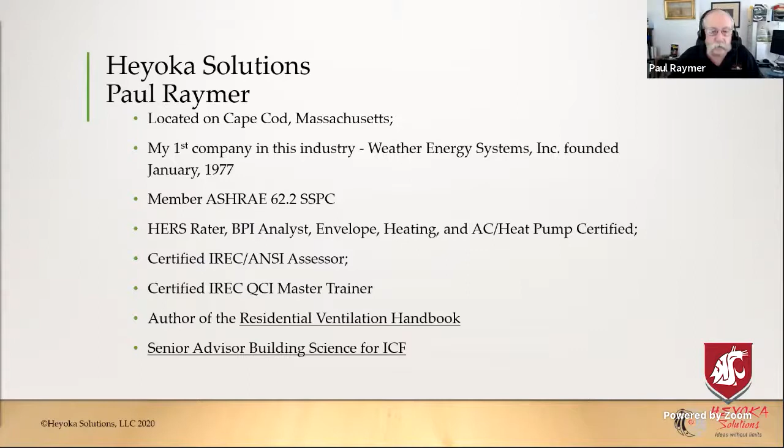I have been doing this for a long time. My company's here on Cape Cod in Massachusetts, and I've been working with fans and airflows and buildings since 1977. My first company was called Weather Energy Systems, which assumed that anything that changed could generate energy. And weather is always changing, so I thought that'd be a great name for a company. I've been part of the ASHRAE 62.2 ventilation committee for 10 fun-filled years. And I've got a whole bunch of those BPI certifications, as Ray said. And I've been told that I really should get a life. It's kind of fun to say I wrote the book on that when people start talking about mechanical ventilation.

Among other things, ventilation is the basis of IAQ or IEQ, indoor environmental quality. And that's what we're going to talk about today, along with a bunch of other things, nasty things, a bunch of nasty pollutants with ghoulies and ghosties and long-legged beasties and things that go bump in the night. There's a lot of stuff in this session, a lot of technical and scary stuff, but also a lot of practical sense stuff that will help you, I hope, to appreciate what's going on in the air around you. The more you know, the better you can be at your job.

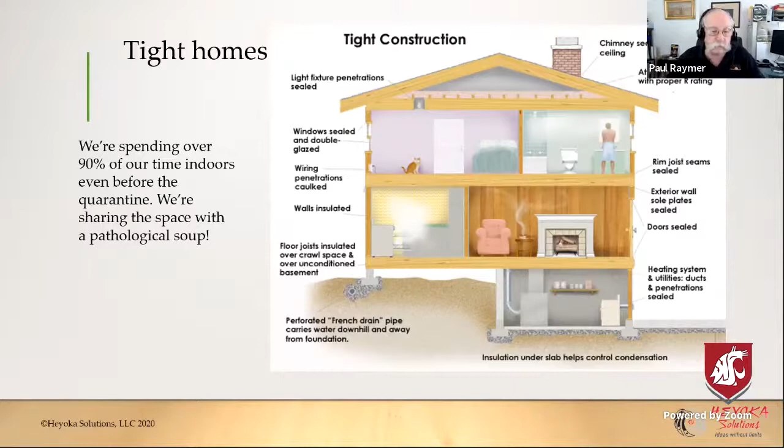So if we breathe 3,000 gallons of air per day, it needs to be good air, clean air, not the air that's replete with all sorts of bad microbes. But we don't want to get rid of all the good microbes, the microbes that fight off the bad microbes.

We bring all sorts of stuff in our homes. The stuff builds up and fills the attic and the basement, and the VOCs, the volatile organic compounds, the stinky stuff builds up as well. And so people buy air fresheners to cover up the smells. If you joined my session yesterday, you may have heard me go through this slide, but some of it's worth repeating. I'm not fond of air fresheners. They often contain lots of toxic chemicals.

The toxic chemicals released by air fresheners, particularly those with pine, orange, and lemon scents, are known as volatile organic compounds, or VOCs. These are well-proven toxins, many of which have been linked to a range of diseases and conditions when being inhaled even in low concentrations over a long period of time.

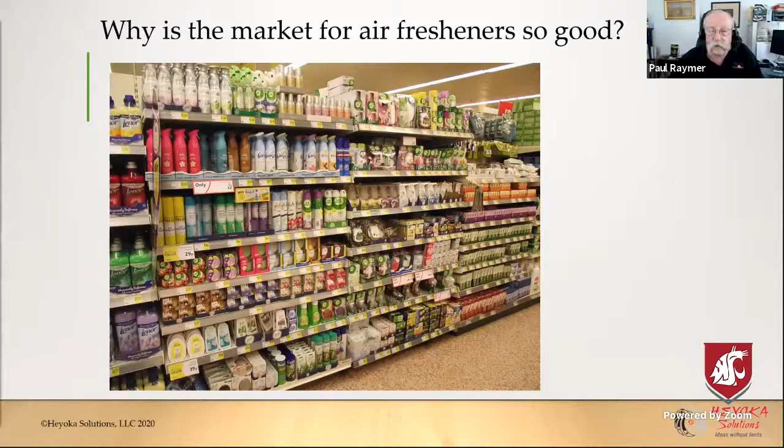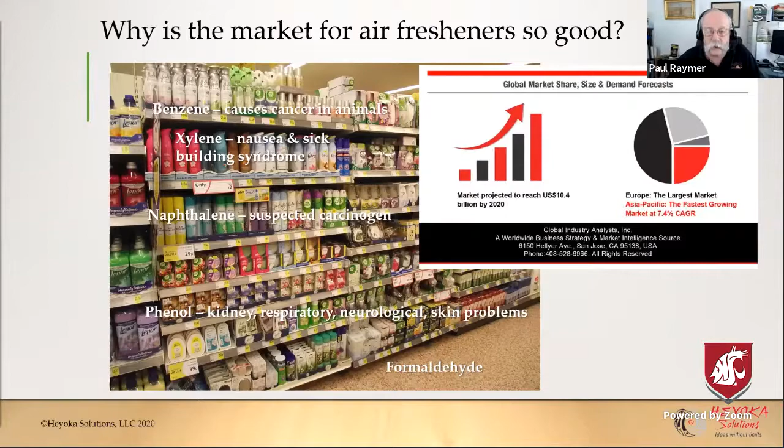Mechanical ventilation can dilute the pollutants in the house, so why not just put a good ventilation system in and let it run a lot, if not all of the time? The global market for these products is surging, but the smells don't get to the root or the cause of the problem.

We're lucky that people are paying more attention to the health in our homes, and not just in special or extreme cases. BPI has had the Healthy Home Evaluator certification for a number of years now. They've just added a Healthy Housing Principles certificate, and the EPA will be sending the Indoor Air Plus for existing homes certification out for public review in October. That's the program I've been working with.

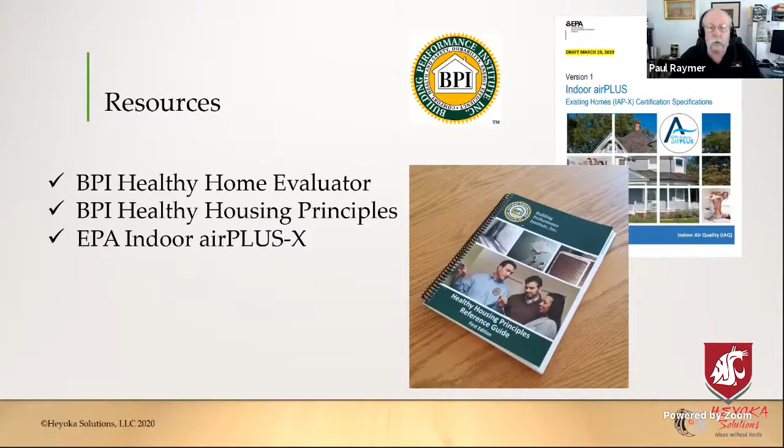The HHP manual is very readable and well illustrated, and not loaded with a lot of incomprehensible technical jargon. Kevin Kennedy was the lead author, and he had a lot of great support authors. You can get this from BPI.

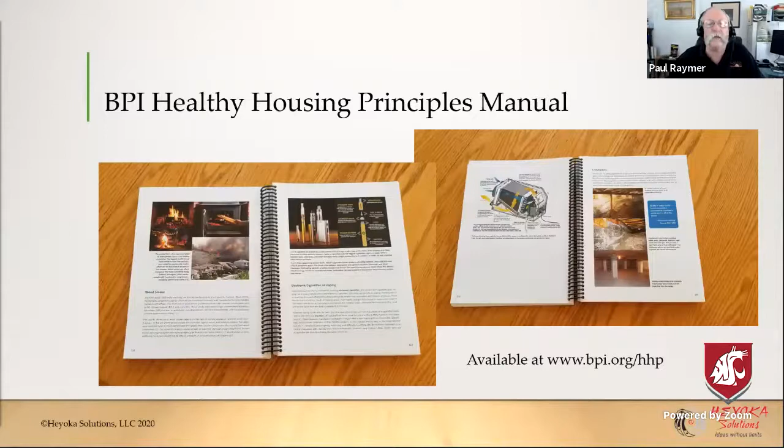So we wanted to get action levels for all these contaminants into the program, but unfortunately, most of the levels are for outdoor thresholds. Part of the problem is that people have different reactions to these contaminants. What might be critical to one person might have no effect on another. And the pollutants are not simple static things. They keep changing and are different in different parts of the house.

But ideally, you would survey a house and look for all these things: arsenic, carbon monoxide, formaldehyde or HCHO, NOx, ozone, PCBs, and particularly PM 2.5 particles and radon.

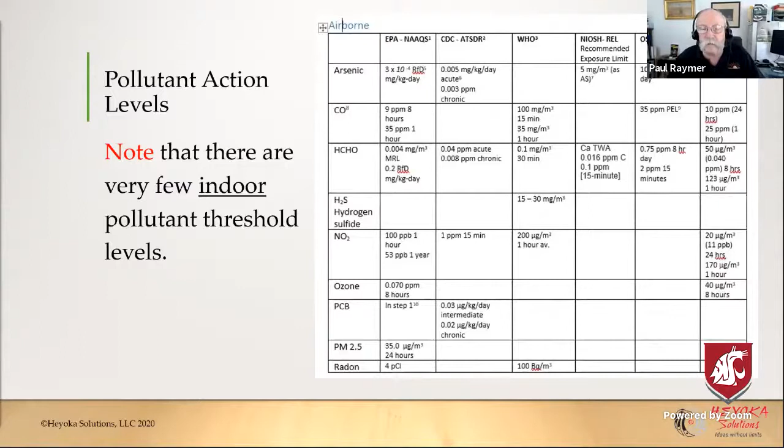So you want to start with the occupants. Smell generally has a short perceived time. Smell is a sense located in the nasal cavities of mammals and relying on the olfactory nerves by which molecules borne in a fluid such as air can be perceived, the olfactory sense.

Occupants are probably the best diagnostic tool. They can't provide a documentable level, but they can relate symptoms and relative levels. Like, does it smell more today than it did yesterday? Did you cook fish last night?

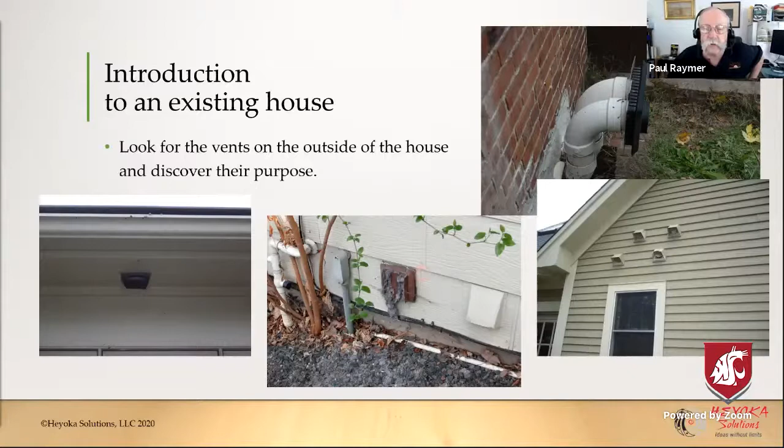The outside vents are part of the nose of the house. Notice that dryer vent installed sideways, full of lint. I don't know how the louvers are going to work with it going sideways, but I once found a dollar bill stuck in the louvers of a dryer vent. You could assume that the lint filter in that dryer was not functioning very well.

After talking with the occupant, a walk through the house can help you get a visual identification of the pollutants. It's like looking for clues in a mystery. What, where, why, when. I tell my students it's like CSI. With that in mind, the hazards can be prioritized and justified.

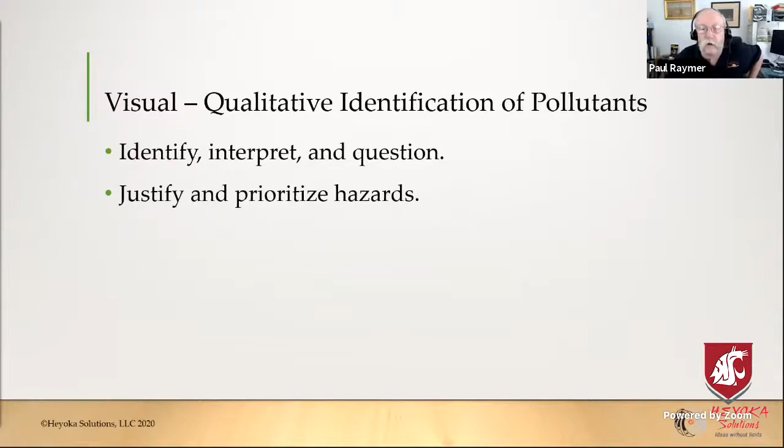Critters can get in lots of places, including ventilation systems. Don't attach ductwork to the fan with screws because they may interfere with the operation of the backdraft damper. And other obstacles like dead bats will also interfere with the airflow.

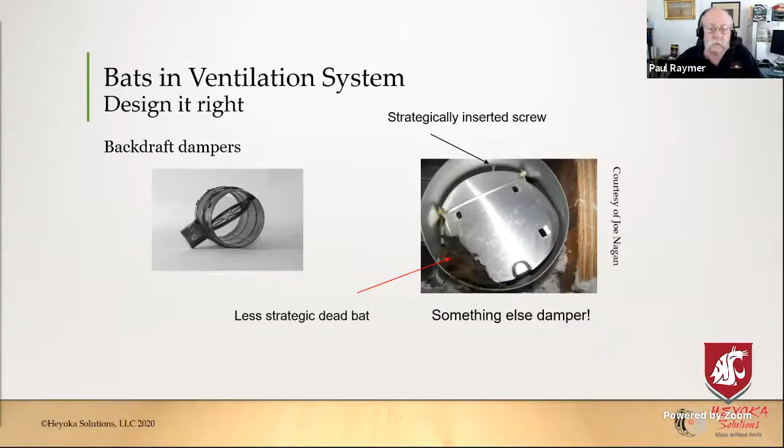And it's important that ventilation systems such as this be located in a place where they can be serviced. The occupant is breathing this air. It kills me when installers put the HRV somewhere in the attic where people will never get to.

What do you suppose is causing this staining on the ceiling? Looks like the heat from the bulbs in the chandelier. Well, that's causing the air movement, but what's in the air? Cigarette smoke and nicotine. This is the home of a heavy smoker. Those stains are going to be virtually impossible to remove, and there will be a third-hand smoke issue in this house for a very long time.

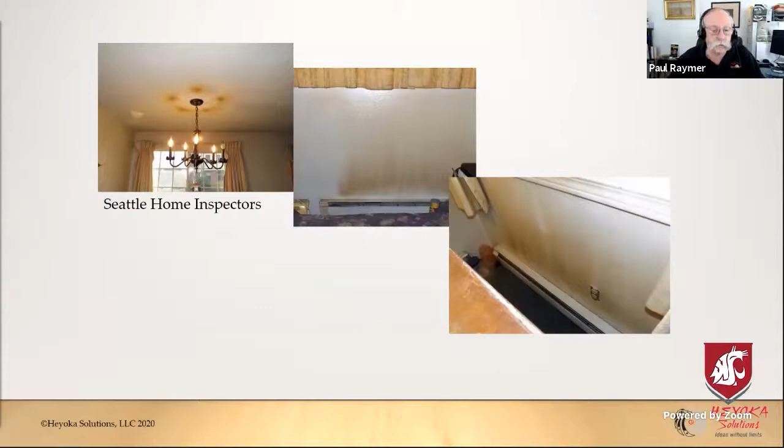Clothes dryers mechanically draw air from the house and blow the warm, moist, and lint-filled air back out to the outside. They commonly draw the air in from the bottom. So it's important not to surround the base of the dryer with junk like dirty clothes and other things. It's also important to keep the lint filter clean. I had to clean this one out with my Leatherman.

Also note that as houses get tighter, clothes dryers may need to be supplied with direct makeup air, or the clothes will simply cook. Dryers can move up to 200 CFM. And if the house is tight, it's going to be hard to move 200 CFM out because it will be hard for 200 CFM of air to find its way in. In a tight house, the dryer can act like a small blower door.

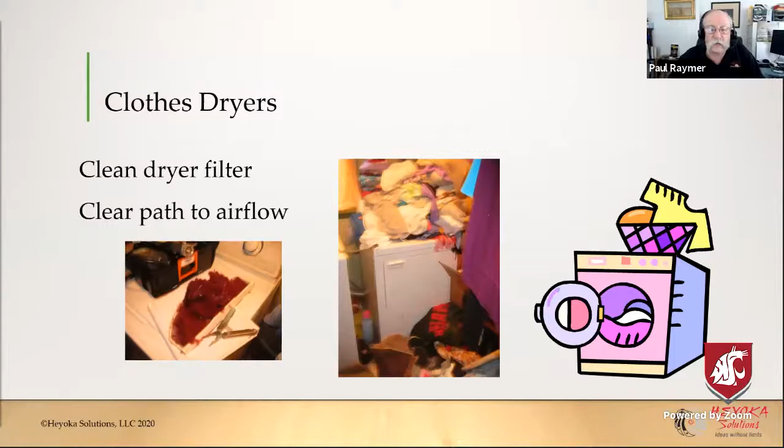And it's important to prioritize the issues to be addressed. Something that's acute is a condition that needs immediate attention. It's extremely great or serious, crucial or critical, like a heart attack or a leaking water heater. Chronic is a condition that's continuing or occurring again and again for a long time, like a nagging backache. So you want to prioritize acute issues over chronic issues.

Then you want to look at cost and easiest to address, because you might just be able to wear a mask in public, for example. If you know what the biggest health benefit is, do that next. And then the fastest health benefit, which will probably take more experience and training.

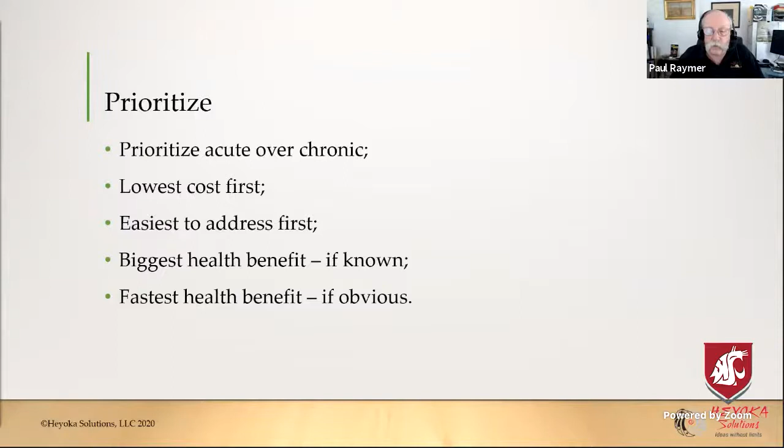These are some of the health impacts from moisture. Excess moisture is associated with an increased rate of respiratory disease. Most seriously, mold can trigger asthma attacks in sensitive individuals. They can also adversely affect immune system function. Note that mold needs liquid moisture to grow. It doesn't need very much, but it needs liquid moisture.

Note that there are three main health problems related to moisture and mold: asthma, infections, and allergies. Symptoms for these health problems include cough, wheezing, shortness of breath, asthma attacks, irritation, and itching.

But the house shouldn't be too dry either. Ideally, we want to keep the house between 40 and 60% relative humidity. That's the kind of range they keep the Mona Lisa in. And she's been doing all right for a couple of hundred years. But the concepts behind humidifiers and dehumidifiers are not well understood by occupants. They have to be maintained and controlled.

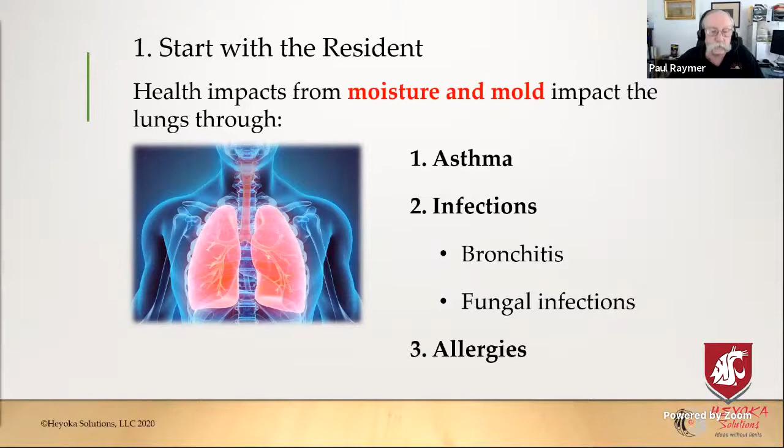The concern about sanitation problems centers on reducing exposure to hazards that can cause health impacts. The health impacts from all of the hazards noted here can be reduced by cleaning, but keep in mind that cleaning is just one part of a multi-intervention approach that is almost always needed. For example, you can clean residue from ETS from a house, but an additional intervention should be persuading the resident to smoke outside. Cleaning can help reduce pesticide residue, but implementing practices to manage pests by reducing their access to food and water is also a way to reduce the use of pesticides.

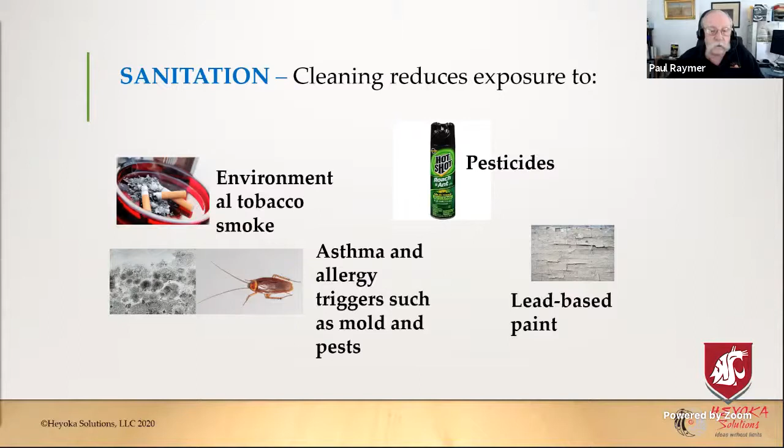These are the health impacts from environmental tobacco smoke, also known as ETS. Again, cleaning reduces the exposure to this contaminant. Most people should be very familiar with the health problems relating to what happens if they smoke, but may not know as much about second and third-hand smoke. Secondhand smoke occurs when someone uses and exhales tobacco products such as cigarettes, cigars, or pipes, and the smoke is then inhaled involuntarily by others.

Third-hand smoke is nicotine residue that remains on surfaces, including walls, doors, drapery, carpets, clothes, furniture, flooring material, books, and acoustic tiles in the ceiling. This pollutant can also be inhaled when it is re-emitted through dust in the air, and it can react with substances in the environment to create secondary pollutants on surfaces.

Tobacco smoke contains more than 7,000 chemicals, including hundreds that are toxic and about 70 that can cause cancer. Since 1964, it's estimated that 2.5 million deaths are attributed in the US to health problems caused by exposure to secondhand smoke. In the US, secondhand smoke causes approximately 3,000 lung cancer deaths annually among non-smokers.

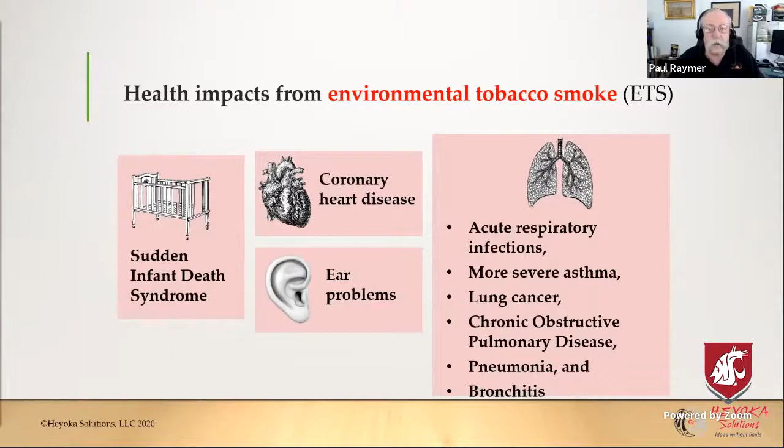These are the health impacts for asthma from asthma and allergy triggers. Note that there is a difference between asthma symptoms and the development of asthma. Having asthma symptoms means an attack has been triggered and the individual is coughing, wheezing, or having shortness of breath. Developing asthma means a doctor has diagnosed an individual as having asthma.

There is strong evidence that indoor mold can contribute to asthma development. The 2009 World Health Organization guidelines for indoor air quality on dampness and mold says that there is sufficient evidence of an association between dampness, mold and asthma development. Now, that does not mean it is accurate to say that mold causes asthma development, simply that evidence shows it can contribute to asthma development. Mold also triggers asthma symptoms.

There is also strong evidence that dust mites can contribute to asthma development. The 2000 Institute of Medicine report called Clearing the Air: Asthma and Indoor Air Exposures says that there is sufficient evidence of a causal relationship between dust mites and the development of asthma.

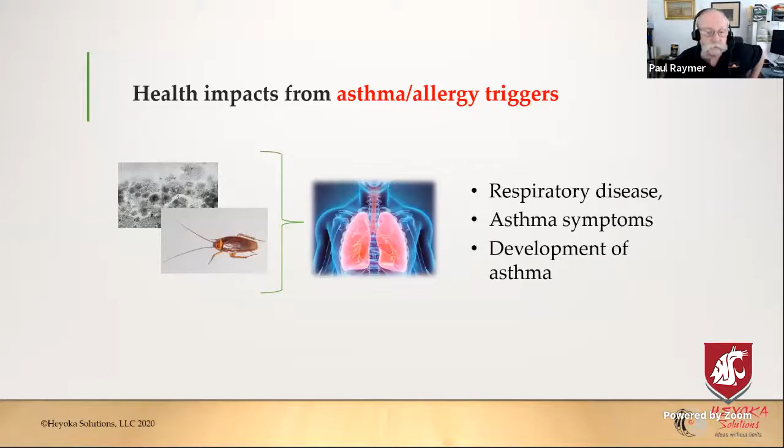Paul? Yes, sir. We had one question that may kind of tie back into the secondhand smoke. Have you seen any data on secondhand vape or any data on vaping related to this as well? That's a great question, and one I was thinking about this morning. But I haven't done any research on it. Just a cursory amateur's opinion on that is that the smoke from vaping has a similar kind of impact, but that's just off the cuff. I wish I could give you a better answer to it. I guess my primary answer is just don't do it.

Is that okay? Yes, it is. Thanks. Sure.

All right, so the health impacts from pesticides are not a whole lot better. The Pesticide Safety Education Program at Cornell University's Cooperative Extension Program notes that the symptoms of pesticide poisoning are similar to those of other types of poisoning and other diseases. Heat exhaustion, food poisoning, asthma, and other illnesses are sometimes confused with pesticide poisoning. Just because a person has become ill after using or being around pesticides does not offer proof that he is poisoned.

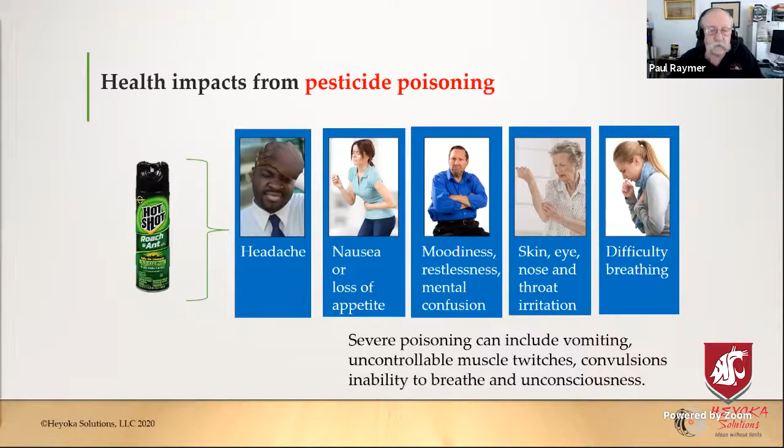These are the health impacts from lead. Cleaning and other maintenance tasks will reduce the exposure to lead, but always remember that there are other interventions that may be needed, e.g. safely removing any lead paint. And we'll talk some more about lead later on in this presentation.

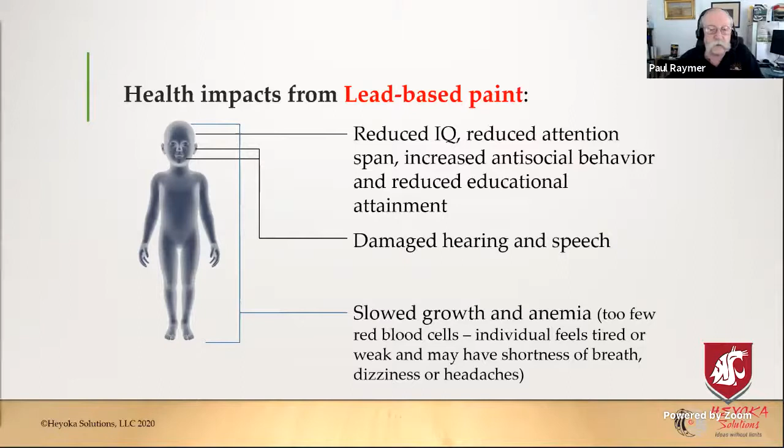These are the health impacts from critters. Dust mites, cockroaches, and mice are all potent asthma triggers. Pests also spread infectious disease. Both cockroaches and rodents can carry dozens of bacteria, viruses, and even fungi. Mice are a reservoir for and can vector salmonella.

Deer mice can vector hantavirus. Hantavirus initially causes flu-like symptoms and abdominal problems. Late symptoms include coughing and shortness of breath as the lungs fill with fluid. There's a mortality rate of 38% from the hantavirus.

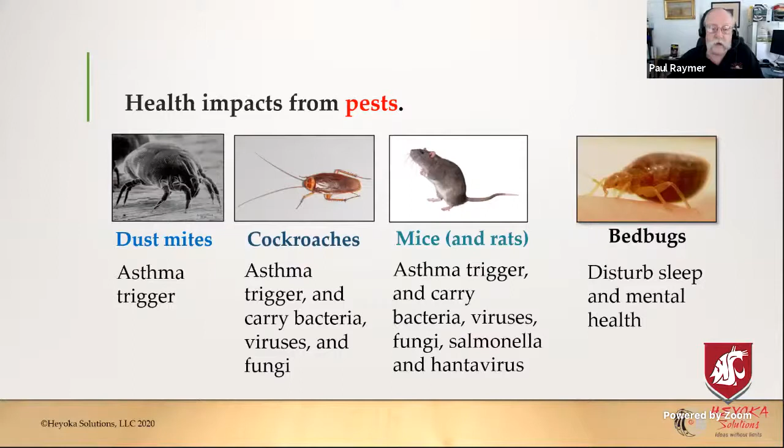When applying insect repellents to children, read all the directions first. Do not apply over cuts, wounds, or irritated skin. Do not apply to the eyes or mouth or hands or directly on the face. Also, use just enough to cover the exposed skin or clothing, but don't use it under clothing.

Many plants are poisonous and should not be found in houses or yards with small children. Occupants should learn which of their outdoor and indoor plants are poisonous and teach their children not to put plants in their mouths.

It's a picture of ants in a sunny sliding door sill. Moisture that the ants need condenses on the glass. The ants don't usually cause allergic reactions, but pesticides sprayed on them might, as we just went through. Often the best solution is patience. Follow the ants as they carry food home and then destroy the nest.

If you see a line of ants making its way through the house, follow it to determine its origination point. Ants can enter through a window, molding crevice, or even a crack in the floor. Keep food in tightly sealed containers or in the refrigerator. Food left anywhere else may attract more ants.

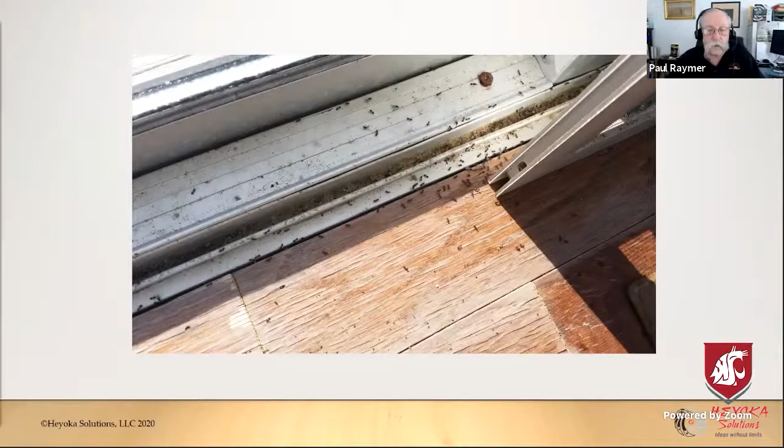The late gastronome James Beard exulted, "There is no smell in the world of food to equal the perfume of baking bread." However, part of that perfume is ethanol, a natural alcohol given off as yeast metabolizes bread sugar during the fermentation that makes the dough rise. When the temperature of the baking bread reaches 174 degrees, the ethanol, a volatile organic compound, or VOC, as the environmental wonks would say, is released into the air.

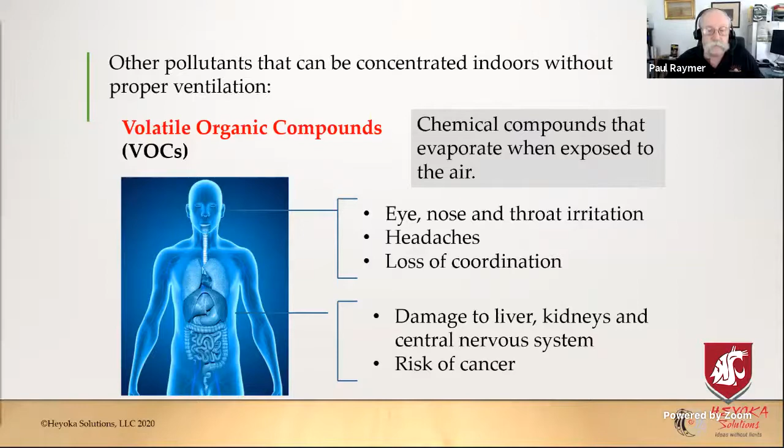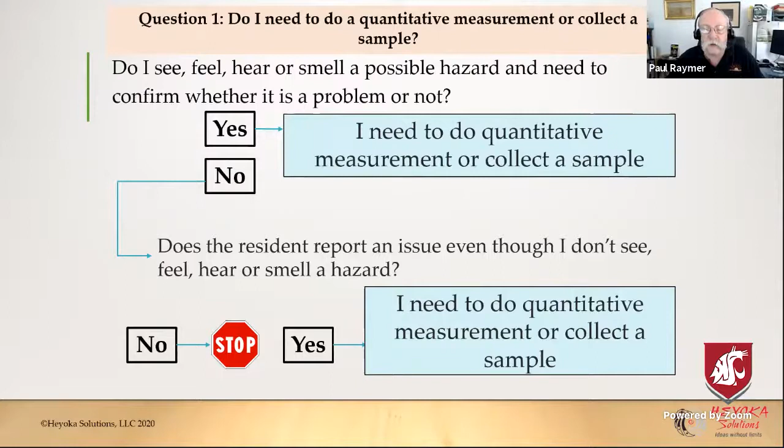You may need to use quantitative measurement and sampling if you need to confirm that something is or is not a hazard. It may be that you can see, feel, hear, or smell a possible hazard, or the occupant reports an issue. Either way, you need to confirm whether there is a problem. Keep in mind that the quantitative measurement should be done in support of or to clarify visual qualitative findings. So let's look at some examples.

First example, you don't see anything wrong with any of the gas appliances in the house, but the occupant reports symptoms that sound like carbon monoxide or CO poisoning. You collect as much information as you can by asking the occupants questions like, do the symptoms disappear when you go out of the house? Does it only happen in the morning? Do you close your bedroom door at night?

You may come to a conclusion as to what's happening, but you need to support that conclusion with a quantitative measurement. The answer to this first example is yes, you do need to do a quantitative measurement. You need to measure if the CO level is above the actionable thresholds. And this is the primary reason that the level of CO in the house needs to be monitored throughout the building analysis. Be sure to make the connection with the HVAC system.

Second example, let's say that you're conducting an assessment and it's very clear that the house has a substantial mold and moisture problem. You see that there is considerable mold on the interior basement walls. Well, you don't need to measure how much mold there is. I mean, you may need to measure it for remediation, but you don't need to quantify it for analysis. You could check the moisture problem with a moisture meter or sample the air or the surface mold, but you can see it. You might want to do sampling for other reasons, depending on the purposes of your assessment. So the answer to this second example is no, you don't need to do quantitative measurement.

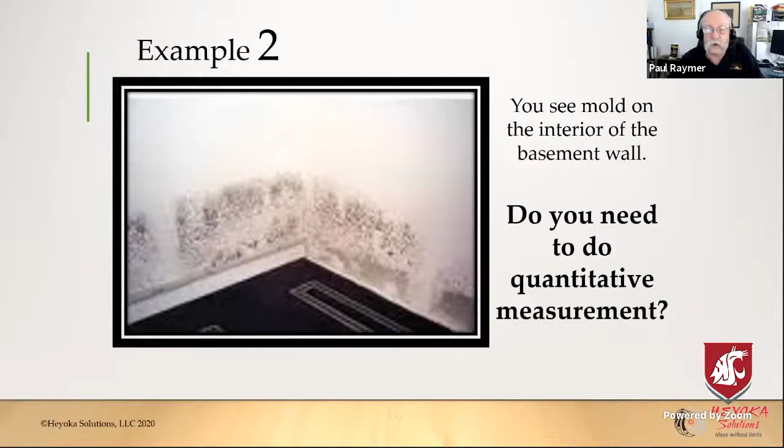Third example, you observe a variety of surfaces in a home that are extremely damp, but you don't directly observe the classic spots indicating mold colonization. In some instances, a uniform, almost transparent fuzziness is just detectable above the surface. This is often not detected through observation, but is clearly represented in the results of samples collected in a damp room with these surface characteristics.

There are simply times when moisture and mold damage is more hidden or of greater complexity. At those times, you should measure or sample to confirm or reject your hypothesis that there is a moisture issue. So the answer to this example is yes, you need to support your observation, your visual assessment with quantitative measurement.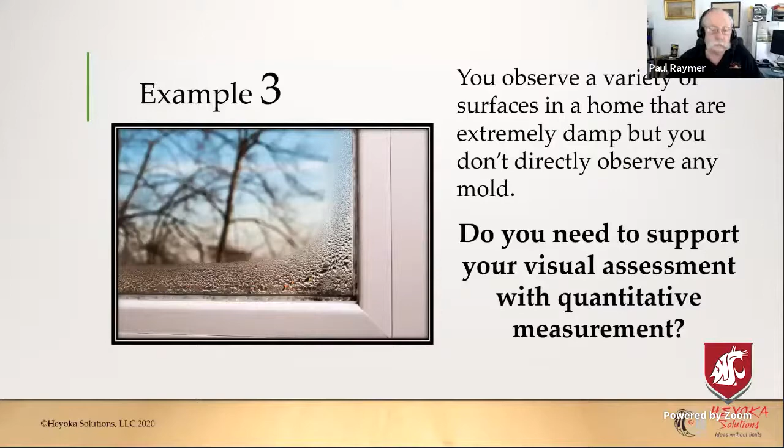Fourth example, and the answer to this one is yes, you need to do quantitative measurement. This is a more complex situation, but not unusual. There are various triggers for allergy and asthma, so quantitative measurement can help the occupant to pinpoint the problem in his or her house. Using vacuum sampling to take a dust sample, you can send it to a lab and determine if the dust mite level in the house is above the health threshold.

In other words, even if the occupant is keeping the house dust-free, he might actually not be doing quite enough. He may also have to address other things, like more regular washing of bedding, getting dust mite covers for his son's pillow and mattress, keeping the pets off the bed, getting rid of stuffed animals, and regulating the humidity level in the house.

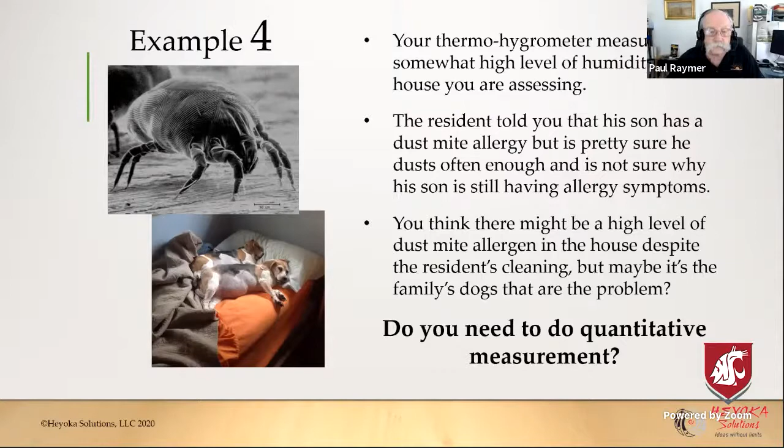So if the answer to the first question is that quantitative measurement is required, then how do you choose the right tool to do the measuring? Choosing the tool you need depends, of course, on the purpose of the assessment. The purpose determines the data quality objectives you would have. Data quality objectives are the characteristics of the data you need. Validity and sensitivity are two of the characteristics that you need to think about.

Here are a couple of examples. A smoke stick tells you which way air is flowing, but an anemometer tells you how fast the air is flowing in feet per minute, which can be converted to how much air is flowing or cubic feet per minute. A combustible gas leak detector gives an audible sound, but a combustible gas indicator provides a reading of the lower explosive limit of the gas present.

Take essential tools with you to every assessment. Basic ones like a smoke stick or a pocket anemometer. They are low cost and provide some important determinations about things that are not easily observed. The first example here is to help diagnose the ventilation issue. Is there enough airflow to a bedroom? Now, just the word enough is quantitative. The first example notes that a smoke stick tells you which way the air is flowing, but an anemometer provides a more quantitative measurement.

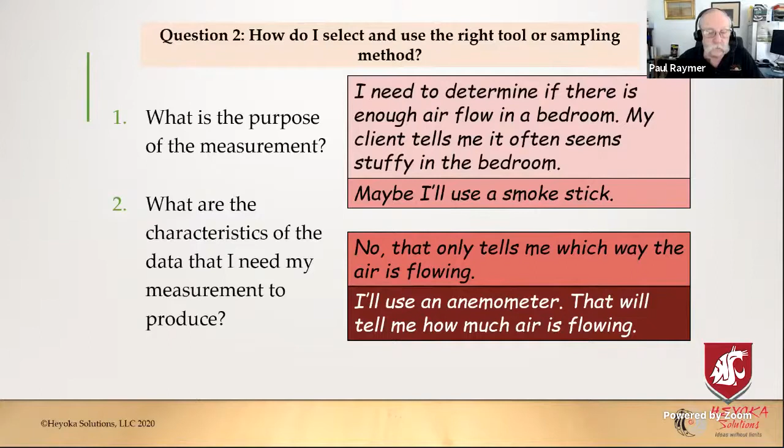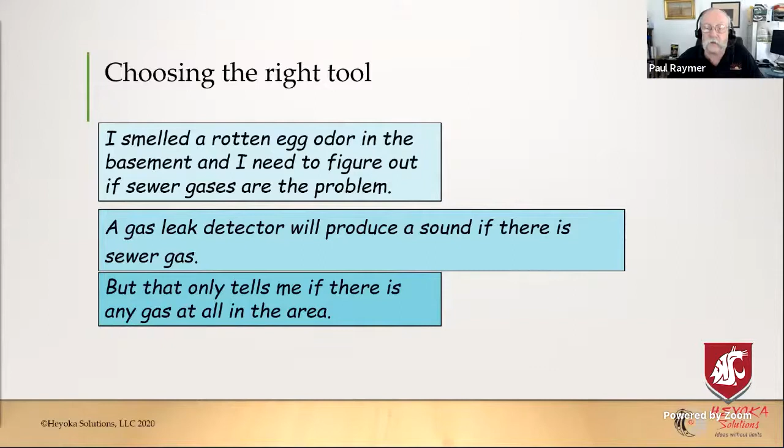For the second example, a combustible gas leak detector gives an audible sound, but a gas indicator provides the concentration of a specific gas, e.g. methane. Methane is the largest single constituent of sewer gas and can cause headaches, nausea, dizziness, and other symptoms at low levels, and can cause death at high levels.

A friend of mine was testing a house, and his gas indicator indicated the presence of gas, but there were no gas appliances, nothing that used gas in the house. He discovered that the connections to the gas lines under the street that fed other utilities to the house were allowing a gas leak to flow into the house he was testing. It was a situation, whoops.

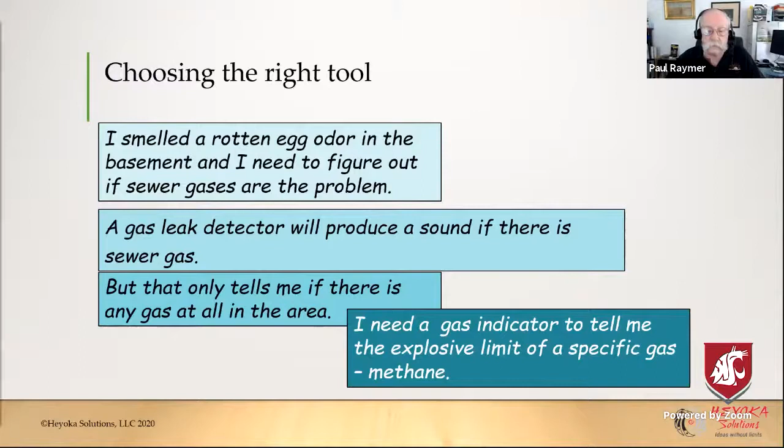Note, of course, that you will come into the situation with a hypothesis, but as you go through the assessment and talk to residents, you may have to revise your hypothesis if the situation is worse or better than you thought, or completely change it.

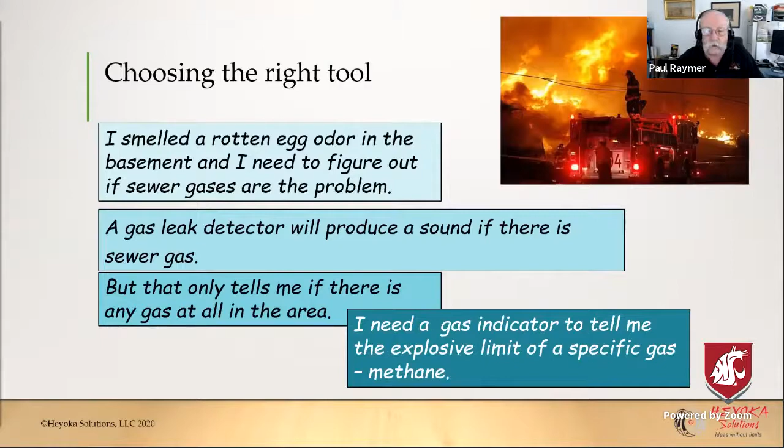We can divide quantitative measurement tools into three categories. You should take the basic tools with you to every assessment. They are low cost and provide some quick and important determinations about potential hazards that may not be easily observed. Then there are the more advanced measurement tools, some of which are quite familiar to energy auditors, like manometers or flow hoods, a multi-gas detector, or maybe even an infrared camera.

Then there are the even more advanced and expensive tools, like a formaldehyde detector, carbon dioxide detector, ozone detector, nitrogen dioxide detector.

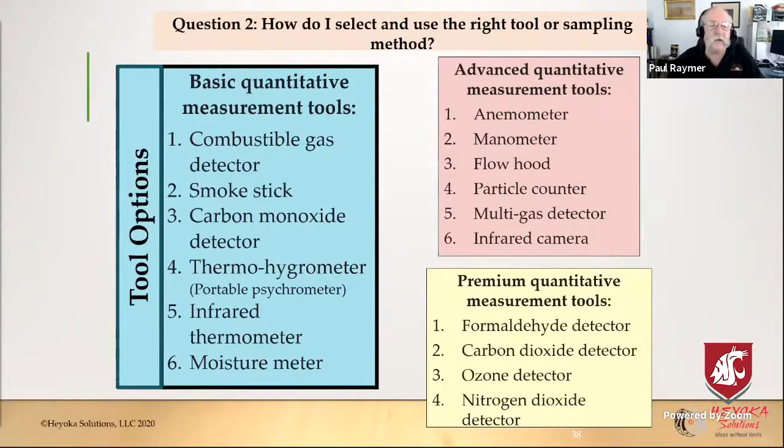These are familiar building auditor diagnostic tools, from the combustible gas detector for CAZ testing to the manometers for blower door testing. The combustible gas detector will display the LEL, or lower explosive limit, for a gas like methane. It will alert you not only to the presence of methane, but also if the surroundings contain dangerous levels. If we were doing this live, I could pass the instruments around and we could turn them on and off and make them beep.

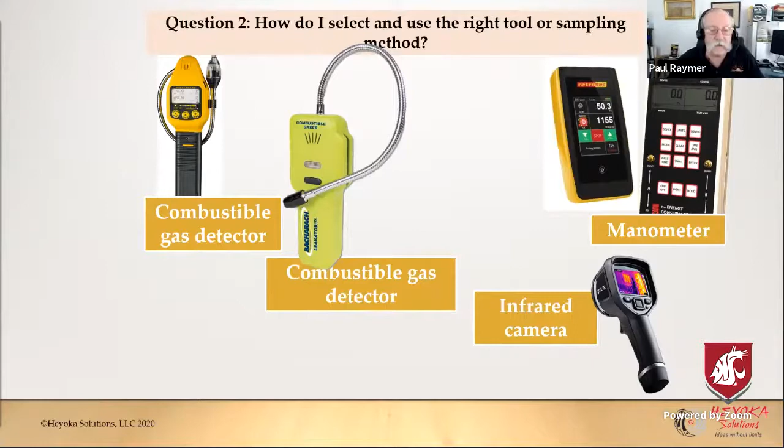Taking this a bit further, we have a moisture meter for a variety of situations, a smoke pencil for checking out drafts, a personal CO detector to keep the auditor safe, a thermo-hygrometer for relative humidity, a small infrared thermometer for checking out cold and hot spots, places where moisture might condense, and a pocket anemometer for quantifying airflows.

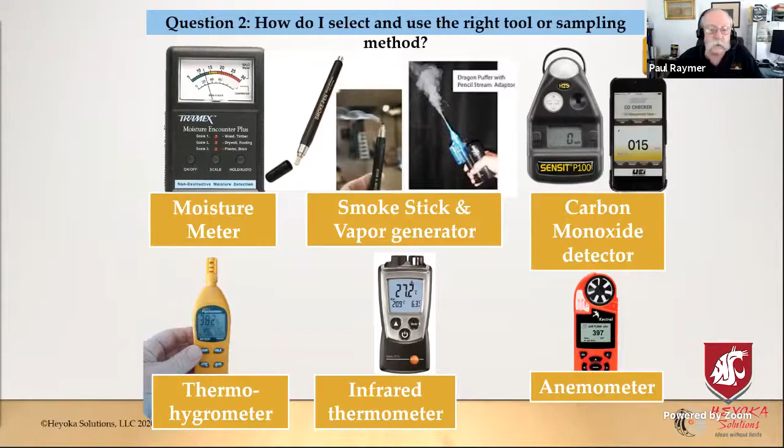A combustible gas leak detector is used to find leaks in a gas line or the presence of gas in a house. A smoke stick provides a visual acknowledgement of an airflow. A CO detector indicates the presence and level of carbon monoxide. A thermo-hygrometer measures the level of temperature and humidity and can calculate the dew point.

We used to have a sling psychrometer, which was quite similar to that. And there used to be a question on the BPI analyst exam about what you use a sling psychrometer for. And it's basically to determine the dew points. An infrared thermometer can determine the cold and hot spots in a room, and a moisture meter. The other thing about a sling psychrometer, the answer really is psychrometric conditions. You want to look that up somewhere. And a moisture meter can be used to determine the percentage of moisture in a material like wood or drywall.

So now IAPX is the EPA's program for indoor air in existing homes that we will be sending out for public review in October. And these are the contaminants that will be included in the IAPX program when it gets sent out for public review: asbestos, lead paint, carbon monoxide, combustible fuels, and ozone. But there are a lot of other contaminants that are not included here, but can be a source of concern in homes.

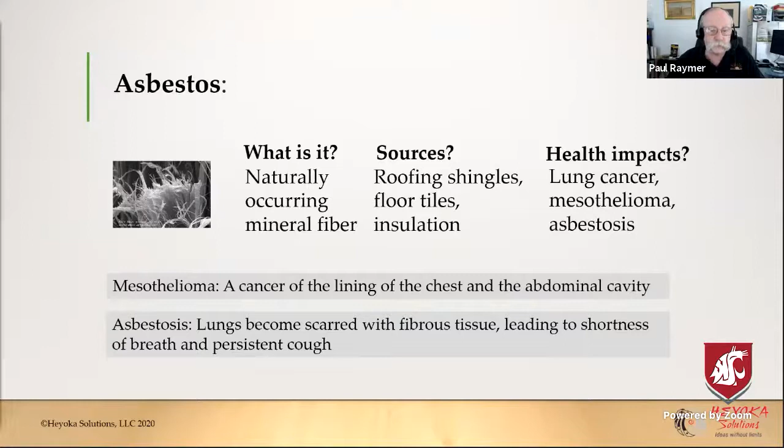Removal costs vary widely depending on surface circumstances. Removing a 10-foot section of asbestos pipe insulation could be $400 to $650.

We thought I might start an old folks removing asbestos company so we could make a bunch of money, but not a good idea.

Some contractors have a minimum fee of $1,500 to $3,000, no matter how small the job is. And a complete removal in a 1,500 square foot home with asbestos everywhere, walls, floors, ceiling, attic, roof, pipes, could be as high as $20,000 to $30,000.

Have an independent inspector do an initial asbestos inspection. The White Lung Association says this costs from $400 to $800 for an average 1,500 square foot house, including lab fees. And reinspection work at the end of the project can be another $200 to $400. If lab work is done separately, a sample lab analysis averages $25 to $75.

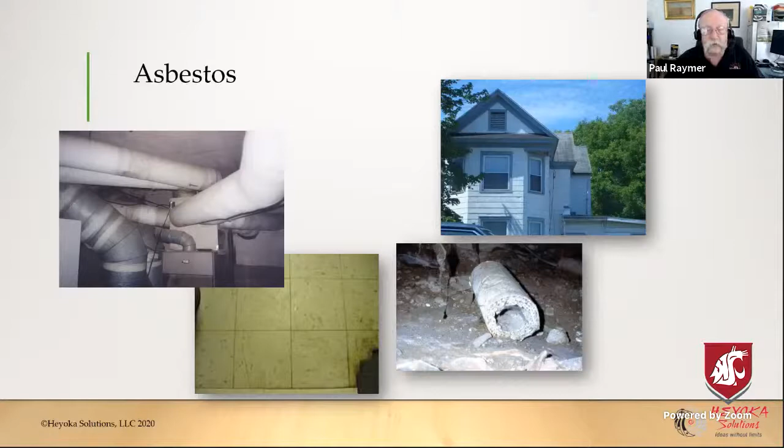Asbestos is nasty stuff and not to be fooled around with. Here in the Northeast, there used to be a lot of steam heating systems and pipes are wrapped in asbestos insulation because it can stand the heat and keep the pipes from cooling and the steam from condensing before it arrives at the radiators. You want steam at the radiators, not lost in the middle of the pipe on its way there.

Carbon monoxide is also nasty stuff. It's colorless and odorless and has about the same molecular weight as air. It is nothing like smoke that you can see and smell. So CO and smoke alarms really should not be combined in the same device. If your CO alarm goes off, leave the building. Do not take the batteries out or wave a dish towel at it. And CO can come from anything that burns.

Formaldehyde is a strong smelling, colorless gas that you may be familiar with from dissecting a frog in biology class. It is used in making building materials and many household products. It's used in pressed wood products such as particle board, plywood, and fiberboard, glues and adhesives, permanent press fabrics, paper product coatings, and certain insulation materials. It is also used to make other chemicals. It is also a byproduct of combustion and certain other natural processes.

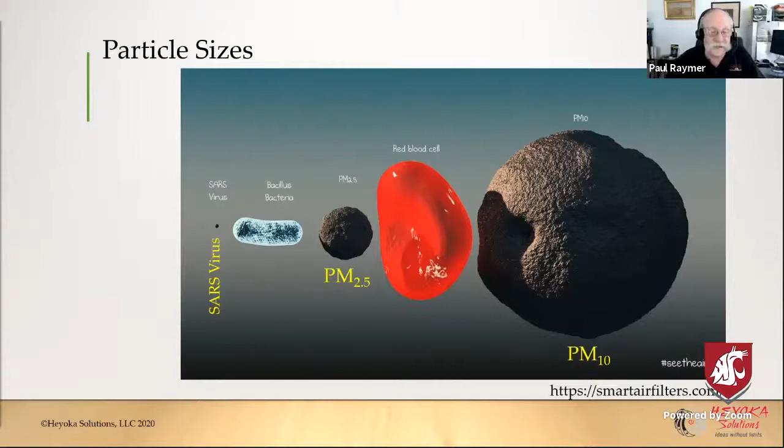So it's green, right? So now, Ray, what's your zip code? 46131. Franklin, Indiana. Well, you're good too. So the PM 2.5 particles are just 43, and today's good and tomorrow's good.

But you can type in someplace like California in here, and it gives you data for the whole state. We look at, some places the ozone level is pretty high. It's in the orange range. You can go down. I was looking at this morning, and some of these are in the dangerous area.

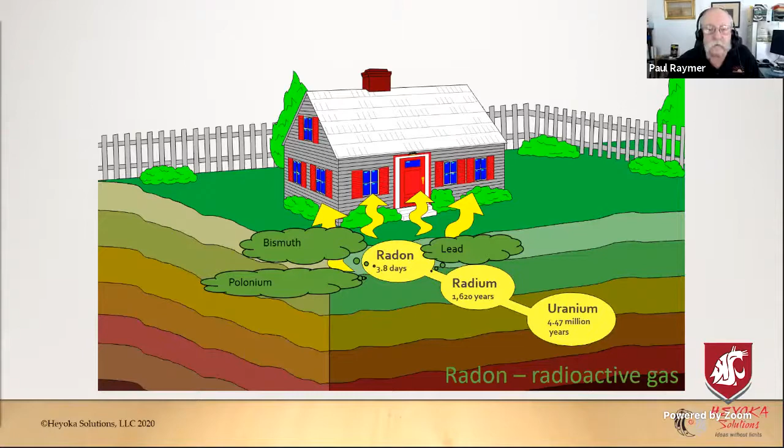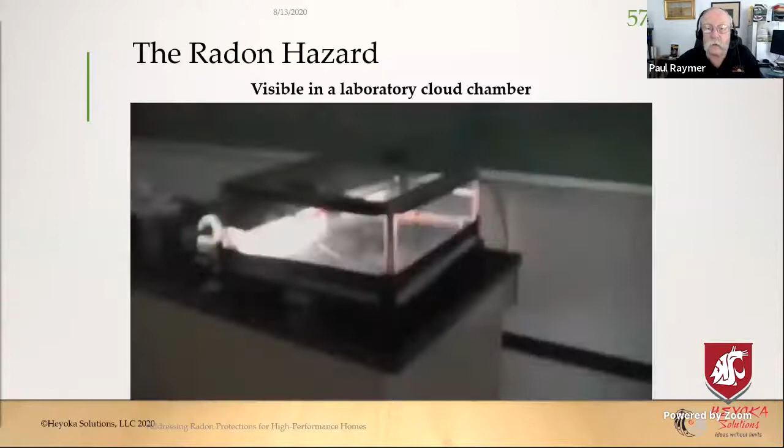I want to show you some radon daughters, as can be witnessed in a small cloud chamber, where radioactive energy from radon causes visible smoke trails. Alpha particle energy releases that come from the breakdown of a radon atom are seen to fly at high speeds for up to about 2 inches. Shorter distances occur if they strike an object, such as a dust particle.

1 picocurie per liter of radon equals 2.2 of these alpha particle energy releases every minute within a liter of air. Within minutes, 2 more alpha particle releases occur from the breakdown of 2 different polonium atoms. Therefore, at 2 picocuries per liter, with about 3 liters of air in the average lung, about 40 alpha releases occur every minute within the lungs. About 2/3 are from the polonium atoms that attach to the liquid lining of the lungs.

At 2.7 picocuries per liter, which was recommended as a goal by the World Health Organization after pooling international epidemiology studies, about 54 alpha releases a minute occur within the lungs. At the EPA's action level of 4 picocuries per liter, it's about 80 alpha releases a minute within the lungs, or about 41 million alpha releases a year.

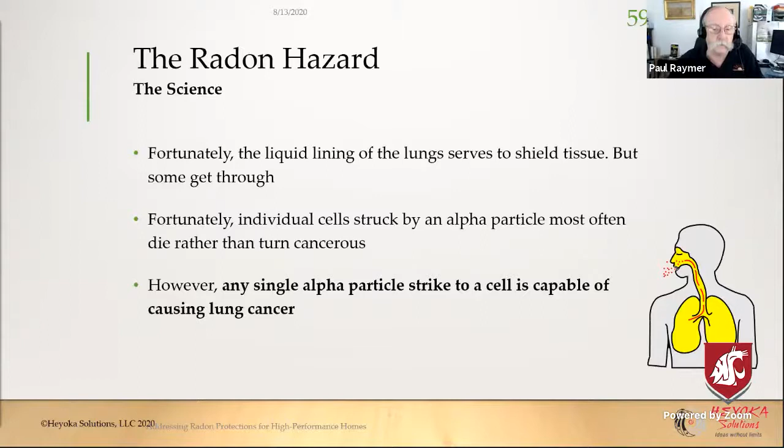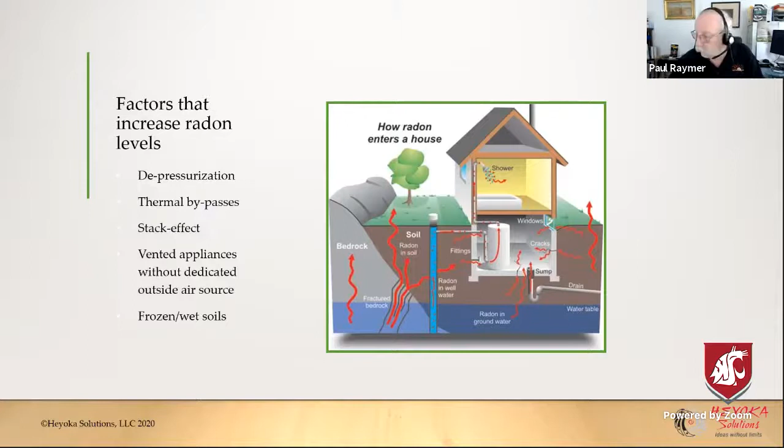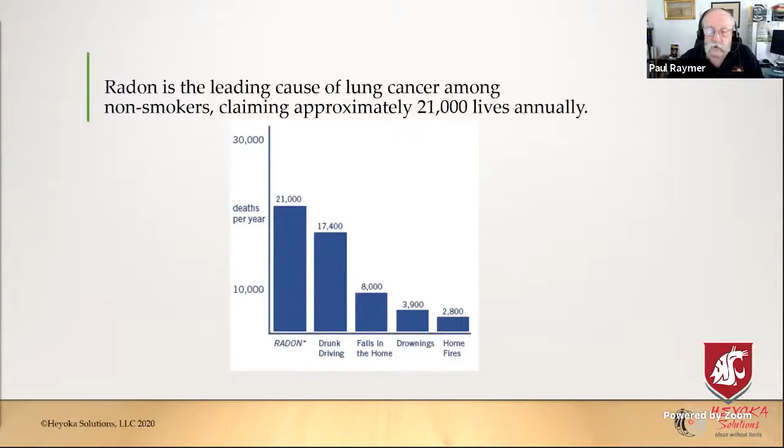So radon is the leading cause of lung cancer among non-smokers. Radon is estimated to cause 21,000 lung cancer deaths per year, according to the EPA's 2003 assessment of risks from radon in homes. The number of deaths from other causes on this graph are taken from the Centers for Disease Control and Prevention 2005-2006 National Center for Injury Prevention and Control Report.

Children have smaller lungs and therefore higher breathing rates. It used to be that children spent up to 70% more time indoors than adults on average. I think we're all stuck in the house about the same way. Radon-related lung cancer is correlated with a person's total lifelong exposure.

According to the U.S. Environmental Protection Agency, a nationwide survey estimates that 1 in 5 schools has at least one classroom with a radon level that exceeds the recommended level of 4 picocuries per liter or higher. So if I had a kid that was going to school, I would take my radon meter in with me. And it just really emphasizes the fact that it's not that expensive to have your house tested.

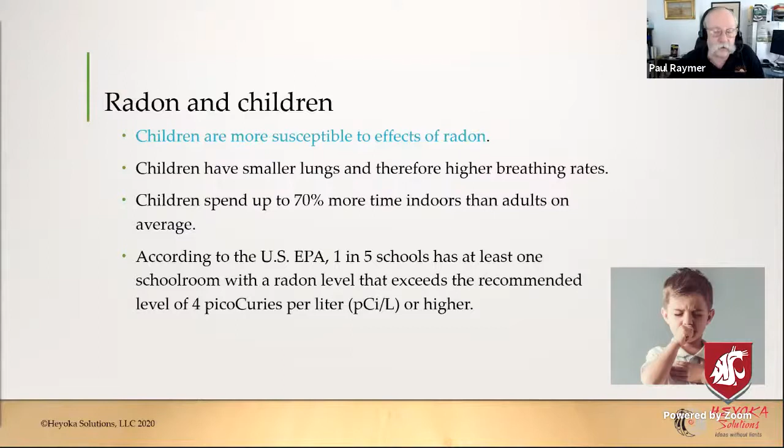VOCs are volatile organic compounds. We've talked about them before. Measuring the TVOCs is interesting, but not necessarily useful because there are so many volatile organic compounds. And some paints are listed as having less SVOCs, or semi-volatile organic compounds, that release their VOCs more slowly.

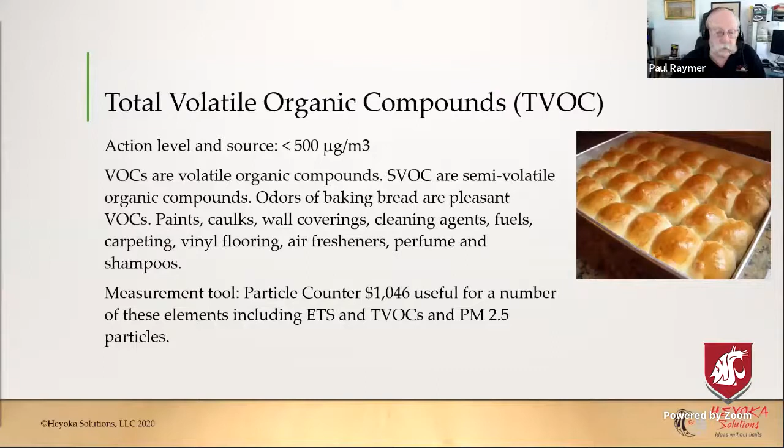When my daughter, who was pregnant at the time, was painting her house, she asked me if she should get paints that had SVOCs. Well, the thing is that with the VOCs in paint, the painters are protected with their masks while they're doing the work, but the SVOCs release more slowly over time. So I'm not sure how long they last in the air, or if I recommended that you use the SVOC paint, but it's going to take a while.

Paul, we have a question regarding the radon. Okay. You're ready for that. So the question is, do good quality respirator cartridges scrub radon? No. No, you can't, unless you wear the mask all the time. I mean, it's there in the house, right? So smoking makes it worse. So stop smoking if you do in the house. But respirator cartridges are not there for radon.

Okay. That was just the information I have on that question, but I'm wondering if maybe the question might be thinking about PPE as far as when you're doing work in the crawl space or in other areas of the house, possibly. Well, that's probably a good idea anyway, right? Monitoring the conditions as you're working in the house is a good idea. You can't carry all this stuff with you down there, but make sure your lungs are protected from all the other contaminants that are floating around.

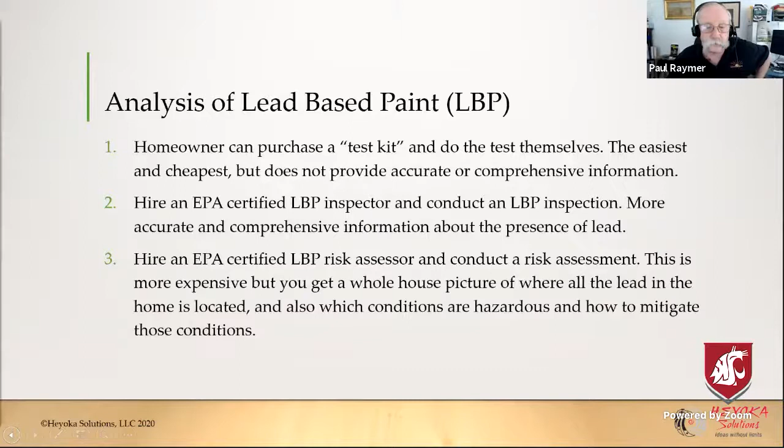These are the health impacts on adults from lead-based paint: muscle and joint pain, high blood pressure, memory or concentration problems, and fertility and other sexual problems.

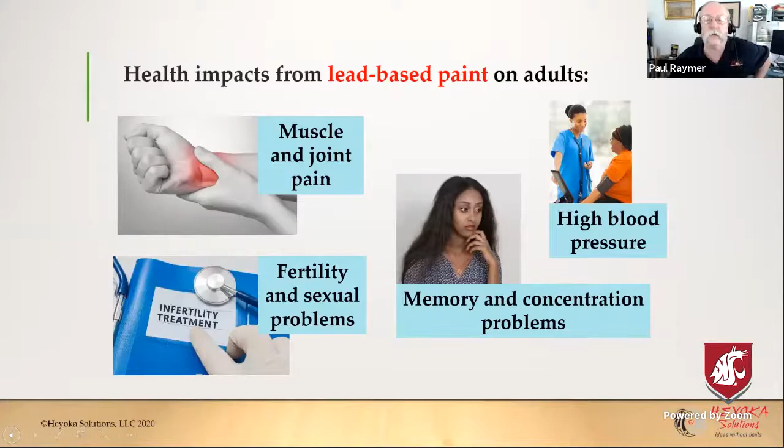All right, so what do you do with all the information you've gathered? Let's look at a problem. Jerome Hill lives in a single-family house in Truro, Mass. He's 32 and lives on his own. He's concerned about an interior wall in a hallway where recently he's had a problem with mold growth. He cleans it and paints it, but it keeps coming back. He bought the house a year ago, and it's only been in the last few months that mold has kept appearing. So what do you think?

This was a house that I actually did. It was the house of a sports writer for the Washington Post, who lived in this beautiful house right on the water. And I brought all my test gear, and I should have brought a bottle of wine because I could have sat there. I was there all by myself and I could just play with things in the house. But this was his problem in this house, so I wanted to come up with a solution for him.

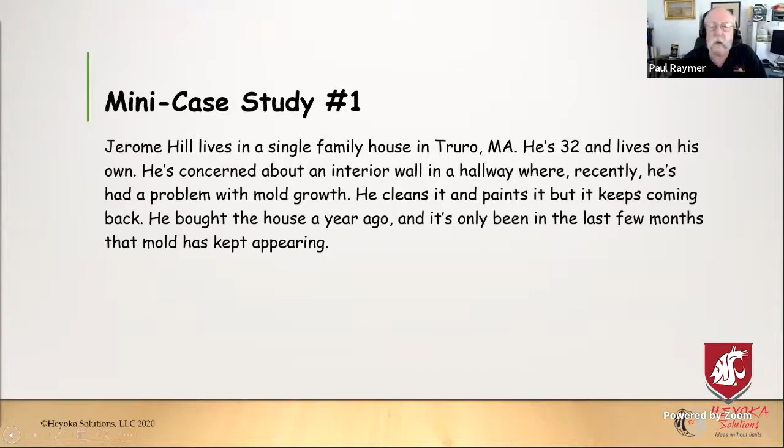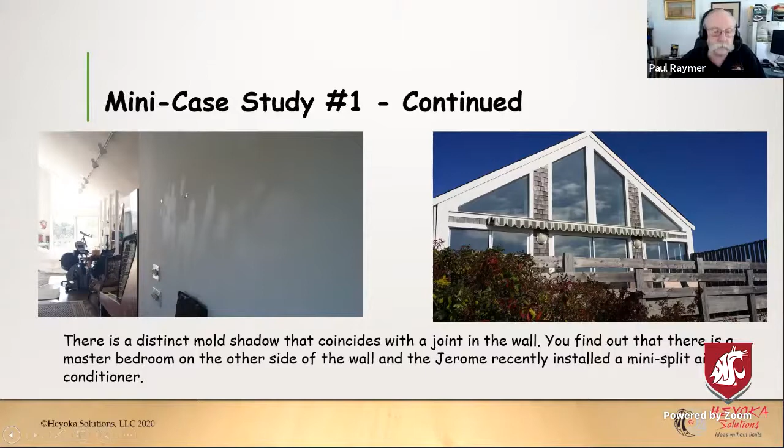So the second case, an elderly couple, Angie and James Miller, live in a single family house in Idaho. Several years ago, they called a contractor because they thought the air in their house was very dry and caused severely dry skin and dry nasal passages. So in this case, the symptom was the dry air in the house, but the Band-Aid solution was to put a humidifier in. But did that really address the cause of the problem?

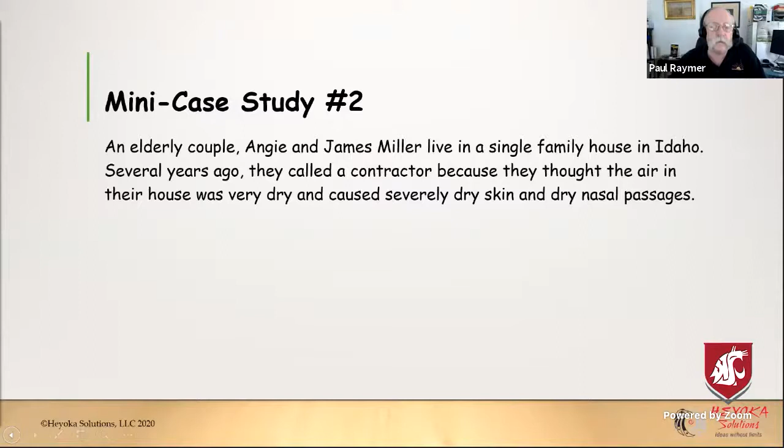So there's a process called the 5 whys. It uses countermeasures rather than solutions. A countermeasure is an action or set of actions that seeks to prevent the problem arising again, while a solution just seeks to deal with the situation. As such, countermeasures are more robust and are more likely to prevent the problem from recurring.

It's simply a series of 5 questions to drill down to the actual cause of the problem, just the way a curious child does. Each time you ask why, look for an answer that is grounded in fact. It must be an account of things that have actually happened, not events that might have happened. This prevents the 5 whys from becoming just a process of deductive reasoning, which can generate a number of possible causes and sometimes create more confusion.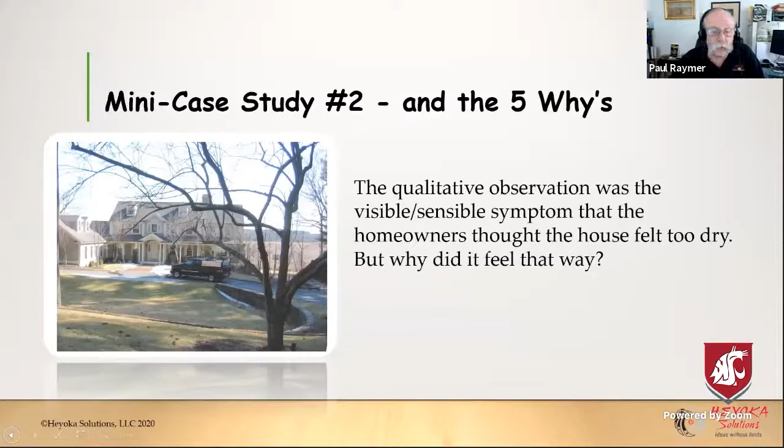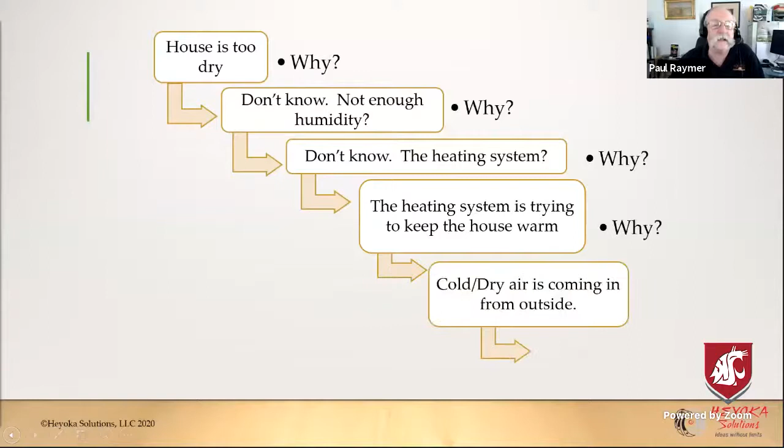So the house is too dry. Why? I don't know. There's not enough humidity. Why? I don't know. Maybe it's the heating system. Why? The heating system is trying to keep the house warm. Why? Cold air is coming in from the outside. Why? Because the house is too leaky. It has too many holes in it.

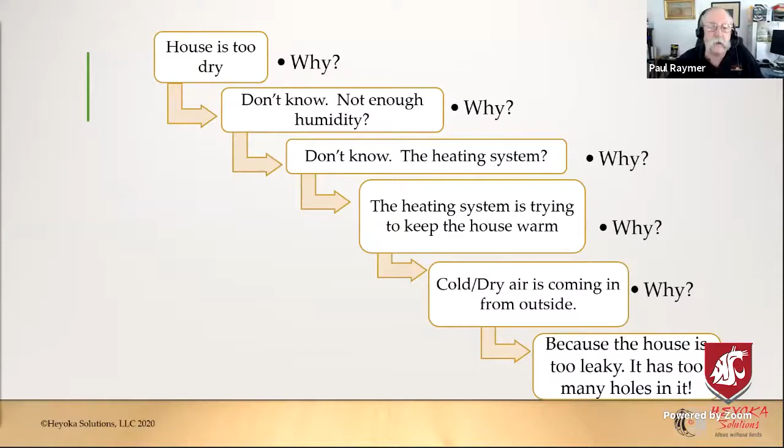So if the contractor had drilled down through the 5 whys, he could have figured out that a humidifier was the last thing he should have done. He should have gotten the house air sealed first. Did the contractor start by diagnosing the cause of the problem, or go right to the most immediate magic box solution, the humidifier? Remember, a house is a system.

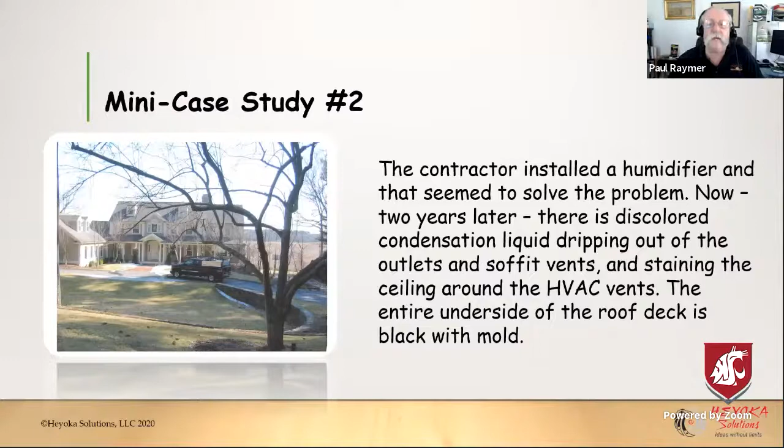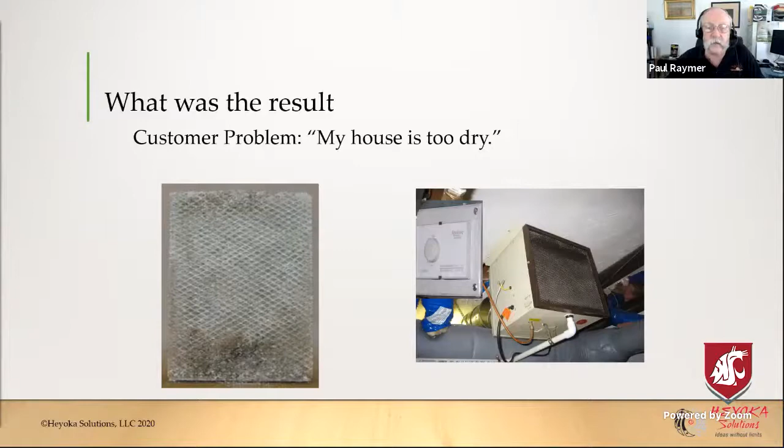One thing leads to another. If you do something to a house, there is going to be another result somewhere else. And you want to try to figure out what is going on before you start making any changes. But he didn't diagnose the cause of the problem. He just added a humidifier to add moisture to the air. Note that these things need to be maintained or they will grow mold themselves.

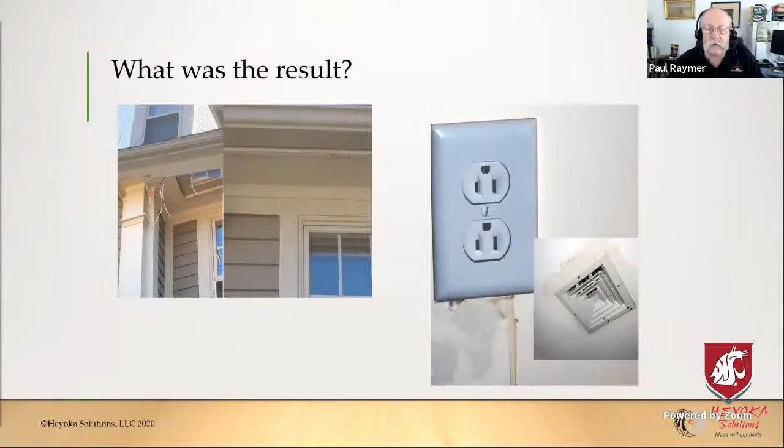The result was that after a couple of years, there was moisture dripping out of the soffit, running out of the wall outlets, staining the ceiling, and creating mold colonies on the underside of the roof deck. When you raise the temperature of cold, humid air, like if it's snowing outside, the relative humidity goes down. So in a cold climate, air leaking from the outside will dry out in the warm interior of the house, no matter what type of heating system. The lawyers had a field day with this one.

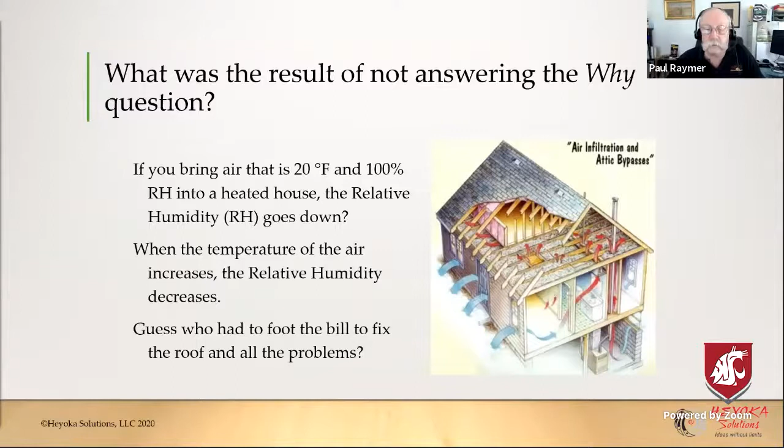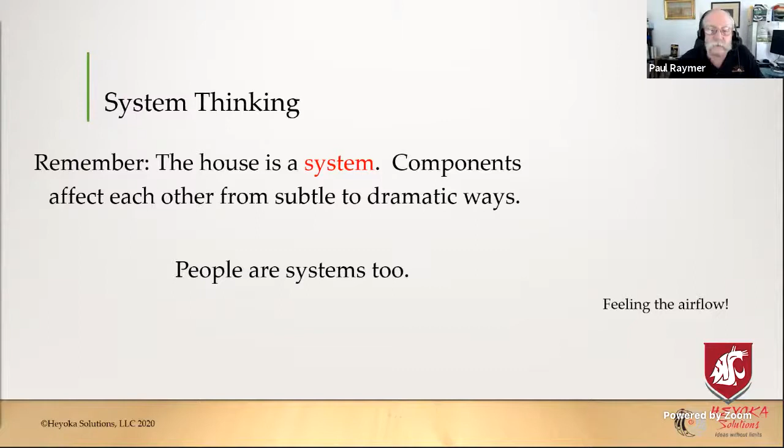Try to stay healthy. So my question is, who will be the first person to enter the EPA radon action level in the chat?